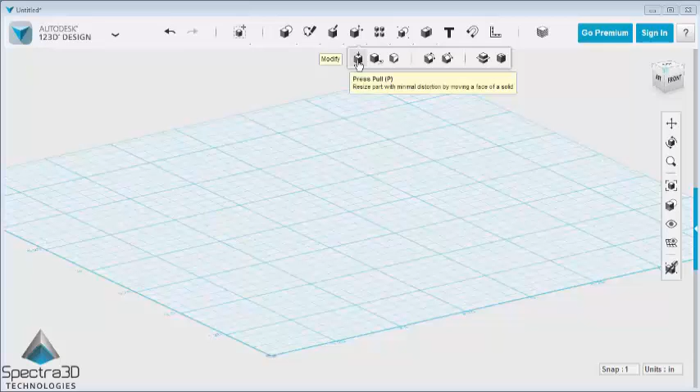The first thing I'm going to do is make sure my units are set to inches. That's simply my point of reference. If you want to use millimeters or centimeters, feel free to, but mine is going to be set to inches. I'm going to go to the Primitives menu at the top of the interface and select Box. Place the box on the grid and enter the dimensions, which I'm going to make 1 by 1 by 1, so I'll have a 1-inch cube in the middle of the modeling platform.

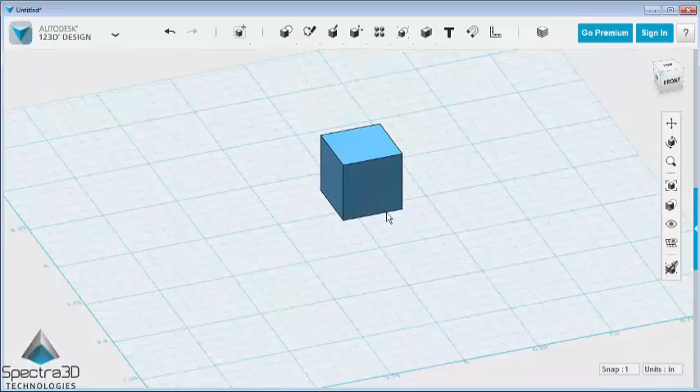The 1-inch cube will be used as a visual reference for me as I create, and it'll also be used as an anchoring point for the different primitives I use as part of the ornament. The next item I'm going to select is a sphere, also from the Primitives menu. As I locate it on the screen, I'll choose a radius of 0.5.

Then I will scale my sphere. I'm not going to use a uniform scale factor. I'm going to use the scaling function to actually deform the sphere into something a little more elliptical and flat, almost like a very flat pill or a flat bean.

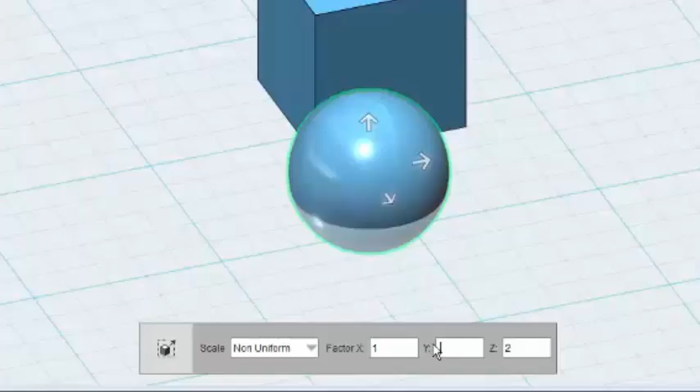The first thing I'll do is change the scaling factor from uniform to non-uniform. I'll leave the X factor at 1. I'll change the Z factor to 2, which will make it twice as long, and the Y factor to 0.5 will make it half as thick in the Y direction. So you can see I've taken that sphere and essentially elongated it and flattened it.

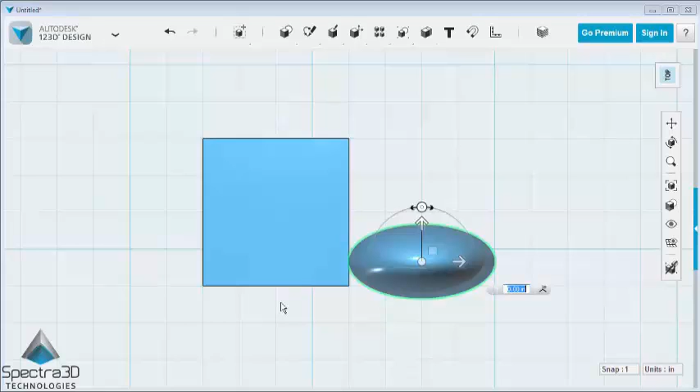Now, looking at the top, I'll select the shape, and when the quick access menu pops up at the bottom, I'll select the move icon, and the transform widget will appear. Then I'll be able to drag the arrows. My goal is to get this shape centered on the vertical edge. Remember, we're looking at the top.

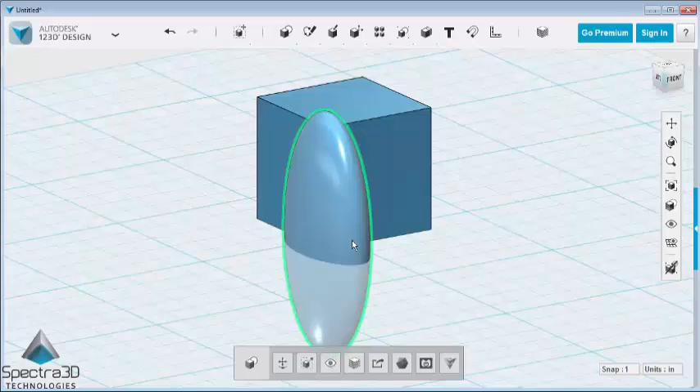So now if I rotate back around, I can move my shape again, up so that it's above the plane.

Now I'm going to choose the circular pattern tool. It asks me to pick the solids I want to put in a circular pattern. I pick my bean shape. Then it asks for an axis. This is very important, and this is the first really functional use I'm going to have for the cube.

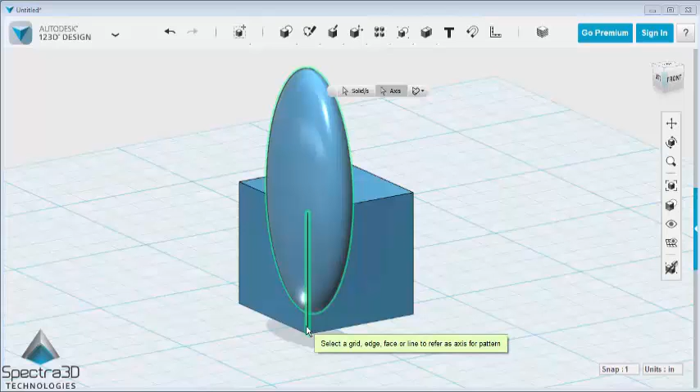The software is asking for an axis about which to generate this circular pattern of the bean shape. I'm choosing the vertical edge of the cube that is actually in the middle of the bean shape, as you can see highlighted. After I choose that vertical axis, my next option is to choose a number.

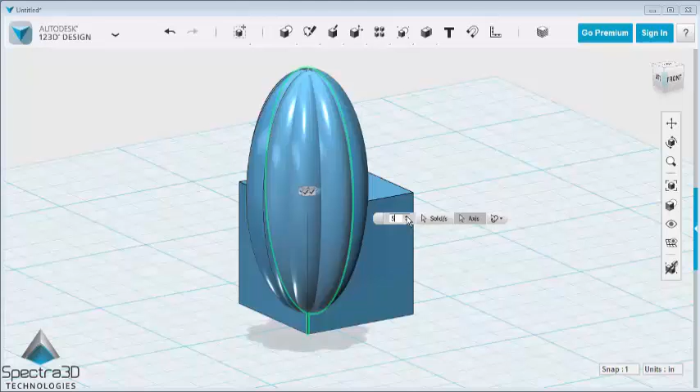You can see as I increase the number how the shape changes. You may notice that going from an even to an odd number, the even numbers kind of look the same to me. I don't know why, but they do. So I'm going to choose an odd number, and I'm choosing 5. Now we can orbit around and see the base. This is the basic shape of my Christmas ornament.

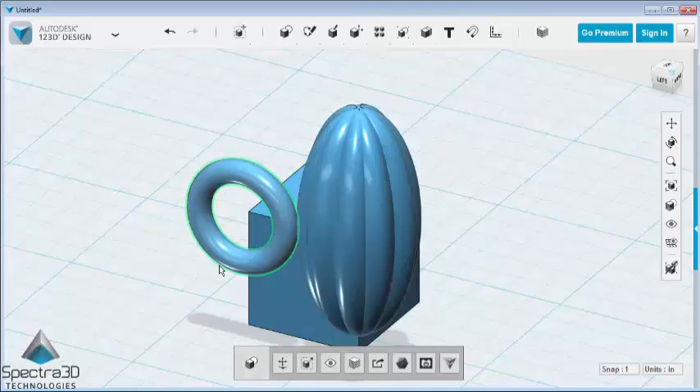Now I'm going to select something I call a torus - it can also be called a donut or a ring - from the Primitives menu. It's going to be placed right on the corner so I know it's perfectly vertical. Now I'm going to scale it using the uniform scale factor, and I can adjust this as I want. I'll leave it at about 0.5 of what it came in as, maybe 0.3.

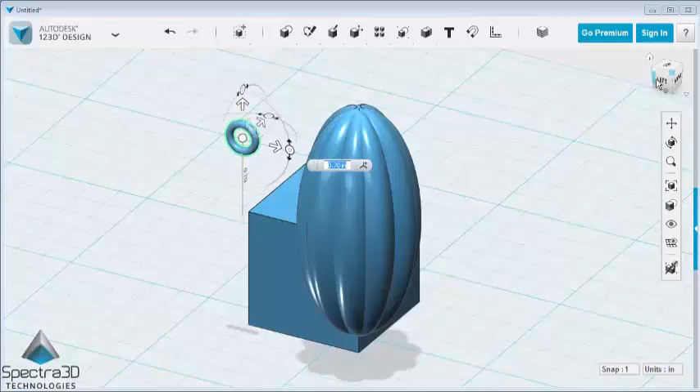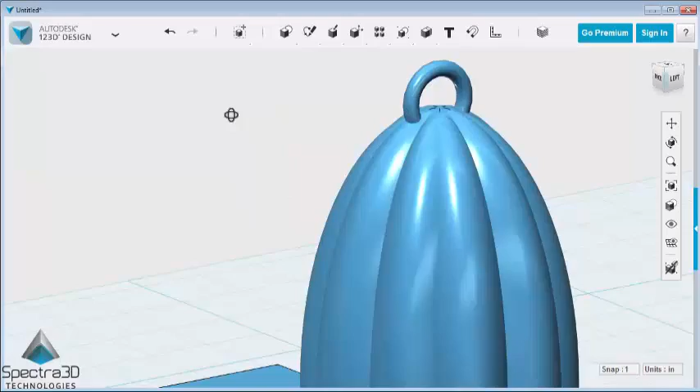Then I am going to move it. This is what's going to end up being the ring at the top of the ornament that the ornament hook goes through. You can see that's oriented pretty well in that direction. Now I'm going to rotate the model around to the front and eyeball it again so the ring is oriented at the middle of the top of the ornament.

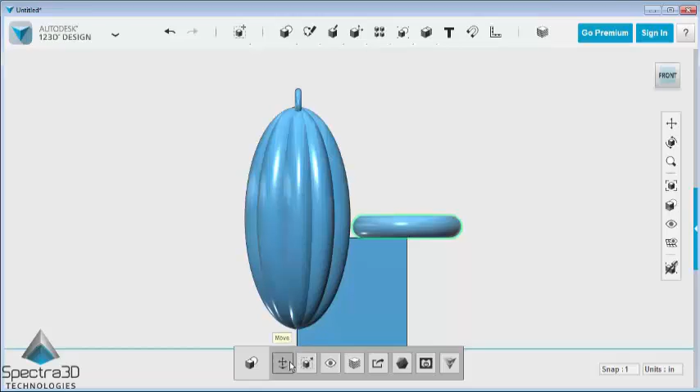Okay, we could stop there if we wanted to, but I'm going to make something a little fancier. You can choose to or not, it's up to you. I'm going to add another torus to my model, making sure this one's horizontal. Then when I select it and click the move icon, I'll move it into the midst of everything, and then scale it just a bit.

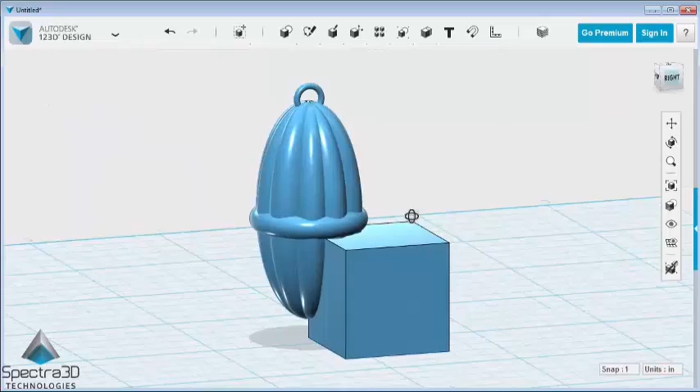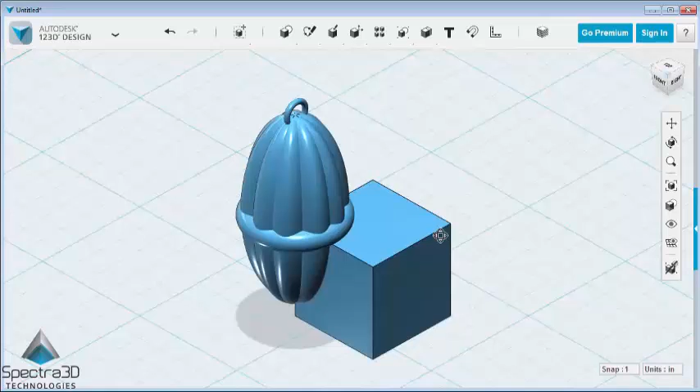That puts a nice band around the middle of the ornament as well. Next, I'm going to delete the cube because it was only there for reference. Before deleting it, take note of the size of the cube in relation to the ornament. As I said, the cube is 1 inch square, so the ornament is only about 2 inches tall by about 1 inch in diameter, which fits within the size limits for the contest and is a logical size for an ornament.

So let's go ahead and delete the cube, and there you have what I'd call a really generic, very simple, almost classically shaped Christmas ornament that you might see on a tree from days gone by.